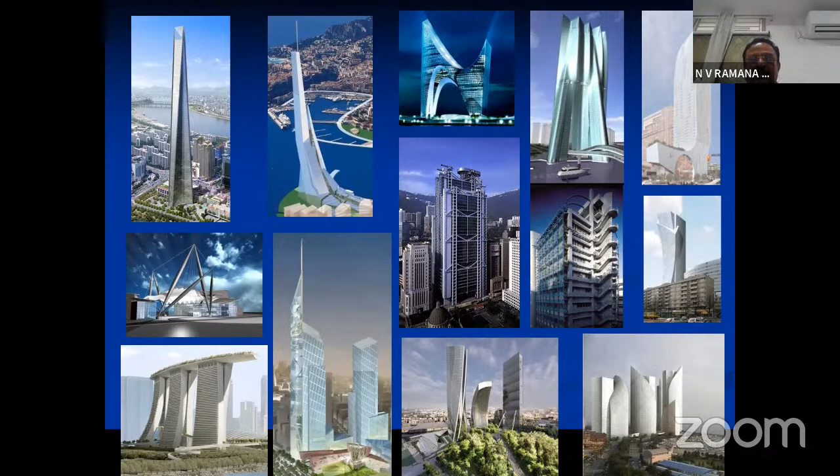So not only there, worldwide, you will find a lot of buildings of different shapes, architecture, engineering. So a lot of reasons are there why they are having so much shape. But all these things are very fascinating for an engineer, and something which we need to really ponder about. And that's what excited me. And then we started working, and then we found many things which are very important as far as high-rise buildings are concerned.

So there is something called the Council on Tall Buildings, CTBUH, which actually designates the tall building based on the height. And you see on the top, the height is calculated from the top of the tower. So sometimes people cheat by actually putting long towers on the top of the building. But that is what it is, and that is the definition that CTBUH has given.

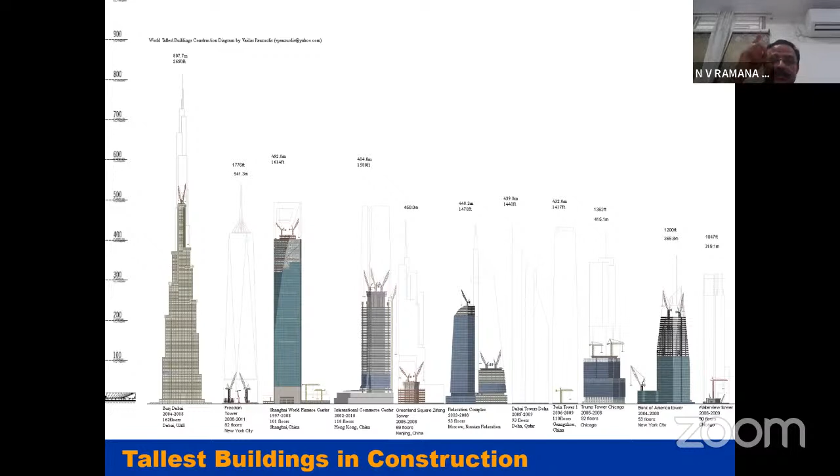And there are several tall buildings, and over a period of time, these tall buildings have evolved. And today, even India is planning to build a lot of tall buildings, not only statues, but buildings also. I will talk mostly about buildings. These are some more buildings over a period of time, a timeline of how they have come. And you see the Burj Dubai is almost 0.8 kilometers high. As a civil engineer, if you imagine what 0.8 kilometers of height is, it is really wonderful. These are the top 10 in 2006, and every year this list is changing.

You can find this in the website of the Council on Tall Buildings and Urban Habitat, which is very, very important. Now, it is not only the design, the construction aspect also is very, very important, because normally, if a two-story building takes, let us say, 6 months, then how much does a 200-story building take? Not just exactly 200 into 6 months. You need to actually adopt different technology, and sometimes instead of going from bottom to top, you may have to come from top to bottom. So there are a lot of technologies involved, and we should be aware.

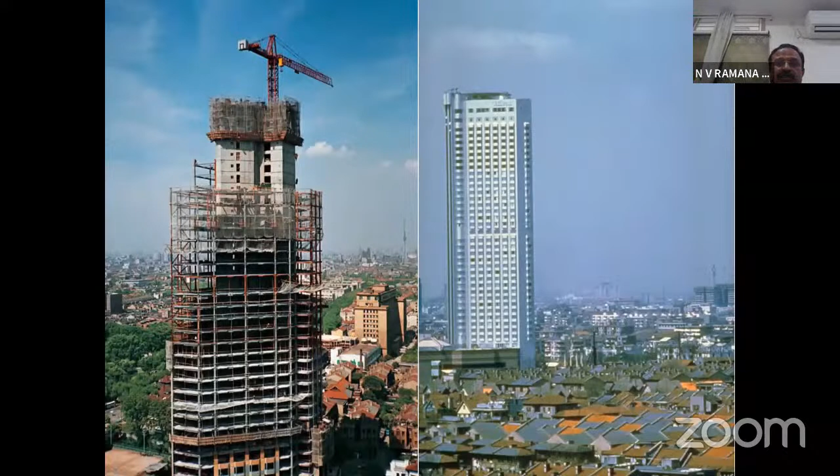And you also need to see what is the surrounding situation, how it is disturbing the architecture, the skyline, other things that are very, very important. In fact, there are some very fascinating buildings across the world, and these are some snapshots to tell you the importance of these buildings. And this is how the Burj Dubai stands in relation to the other buildings in that area. I had the opportunity to visit, and really it was quite encouraging and challenging to see such a marvelous structure being constructed in an area which is nearly on a sea coast.

There are some other interesting buildings. This is Bahrain. The Gulf actually has a lot of such buildings. A lot of money is there, and they can. What is interesting in this building is the architect has actually given a gap between these two. So what the engineer thought is, by connecting these two buildings and putting a turbine to this, you're also generating electricity required for the building.

And that was a wonderful idea. Two things: it is adding stability to the building, and it is also generating electricity, sustainable things. And W.S. Atkins was a consultant, and Dr. Anchuri has really worked very hard on these things.

And when you actually see the cross-section of the building, you can find the Taipei 101 in Taiwan, where I again had the opportunity to visit. The configuration is simply a rectangle with small changes in the edges. Then the Petronas Tower is like a circular thing, and then you've got Jin Mao Tower, which is almost like an octagon. Then you have International Finance Center, which is again different shapes.

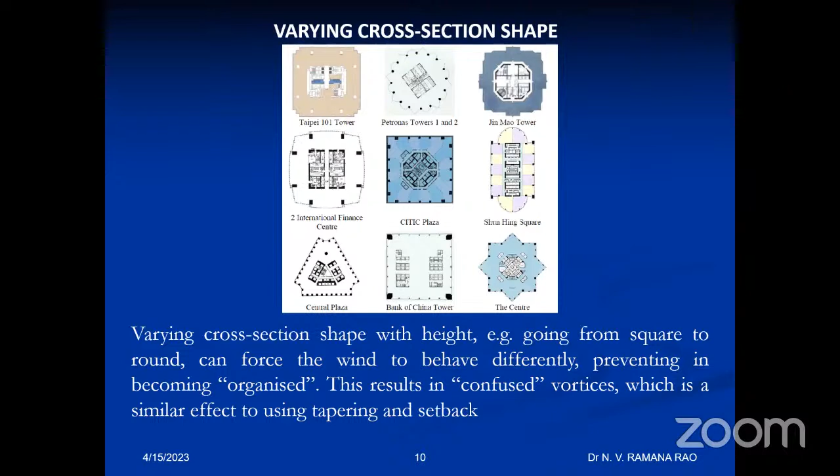Thank you. So from square to round can force the wind to behave differently. So when we think of a tall building, it is not the earthquake that is more important, not the gravity load. The wind load is what becomes critical, especially in coastal areas, where wind is a very important parameter. And most of them are designed in such a way to reduce the wind drag on the surface. This results in confused vortices, which is a similar effect to using tapering, etc.

So you see the edges, especially in these buildings, are made rough and staggered, so that it breaks the wind speed. So a very interesting concept, what we call vortex shedding. This is another building in the UK. It's called the Swiss Reinsurance. The vortex shedding can also be reduced by adding spoilers. On the surface, there are some projections, like steel rods. So this is actually a surface projection.

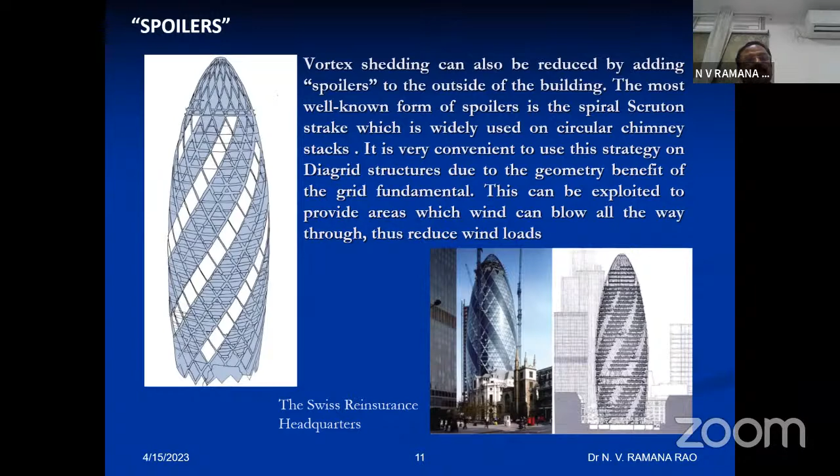You go close to the building, and what these people have done is they have put mirrors in that. It looks very good, actually. The most well-known form is a spiral Scruton strake, which is widely used on circular chimney stacks. It is very convenient to use this strategy on diagrid structures due to the geometry benefit and the grid fundamentals. So this is going to break the speed of the wind and also reduce the wind load on the structure. Then you have other structural forms.

Now we have got buildings which can rotate also, and each floor can rotate independently. So then there is no issue of vastu and other things. A lot of things are actually happening in building technology. And most of these, as I told you, are being copied from nature. So this is the Dubai flower. The structural form has been obtained from that.

This is a Greek firm. Petra architects have designed this blossoming Dubai. It was a proposal for the Zaabeel park, and this is now completed actually. I had the opportunity to see it. The design is in the form of a blossoming flower. So the designer actually got inspiration from nature in developing the form.

Why nature? Nature actually teaches us many things. There are trees which have survived several thousands of years in spite of earthquakes, winds, cyclones and all that. So we need to learn from nature, and there's huge research going on in the building sector, and I think Professor Anjuri is also working on it.

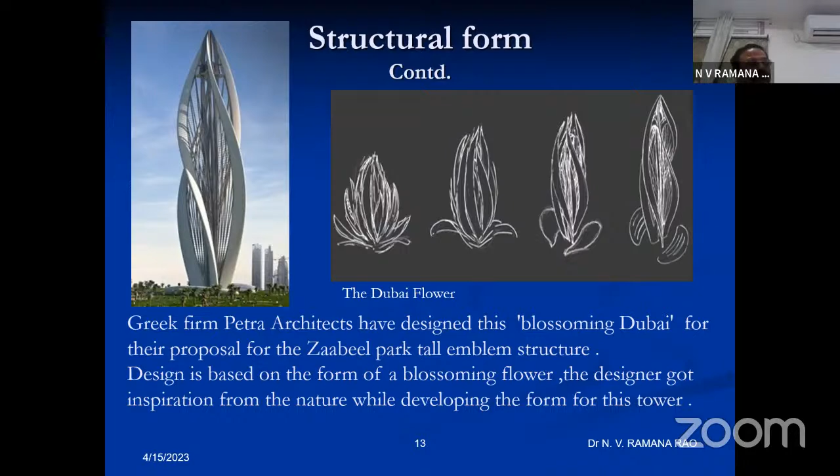Of course, he's a consultant, but he tries and does a lot of experiments. So what we need to do is, we need to carry out stress analysis. Today, we are lucky that we have got sufficient stress analysis tools, finite element tools. We have got software tools which actually try to analyze the lateral deflection, displacements, all the output parameters like bending moment, shear force. You can get to an accuracy of 10%, 1%. So that is the accuracy that you get.

So we can do a lot of saving in the material, and you see how then you decide. In fact, sometimes you evolve the form. That was what our topic was. So we start with some rectangular form, and then slowly we evolve into a shape where the stress leveling is there. What does it mean, stress leveling? That means every part of the building is almost having the same level of stress.

Otherwise, what happens? There is too much wastage of material you are using. Suppose in the lower portion the stress is more, you can use thicker, but in the higher portion stress is less, use lesser material. So that's how the tapering comes up. Of course, functionality will have to be kept. So all these are very, very interesting concepts that actually give a lot of structural insight, and give a spark to structural engineers.

And today I'm happy that in Hyderabad also, we have a lot of engineers who are working in this area. And I understand there is one seminar being organized very soon on high-rise buildings, or it's already over, I don't know. So this is a Dream Tower, again, a Korean architect has done.

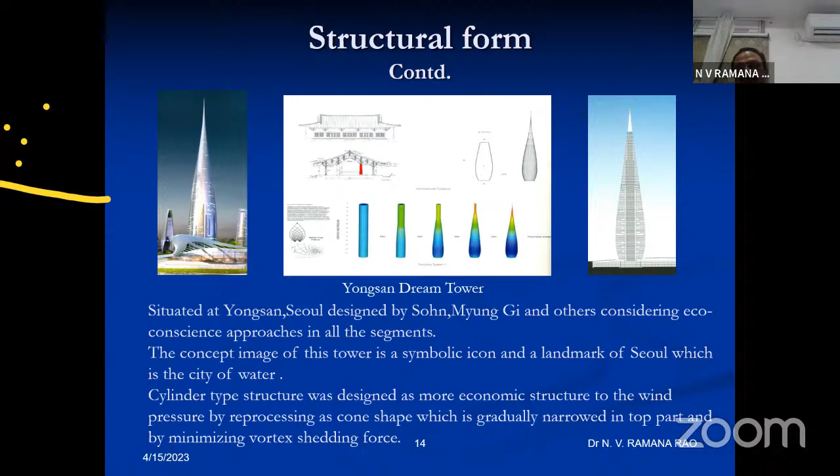Then again, the Dubai Tower I told you about, which is actually 1.2 kilometers high, the main portion is almost 800 meters high, and the tower portion is there. And there are 1,000 shops, 16,000 parking spaces, and so much space is created. And you have some very fascinating buildings in the country.

So wherever there is a shortage of land, wherever there is a shortage of space, engineers are coming out with interesting things. Of course, the basic mechanics remains the same. Like the cantilever has to be supported and all that. There's a balancing and all that. So that doesn't change. But they are playing with it, and very interesting things have happened in the building line.

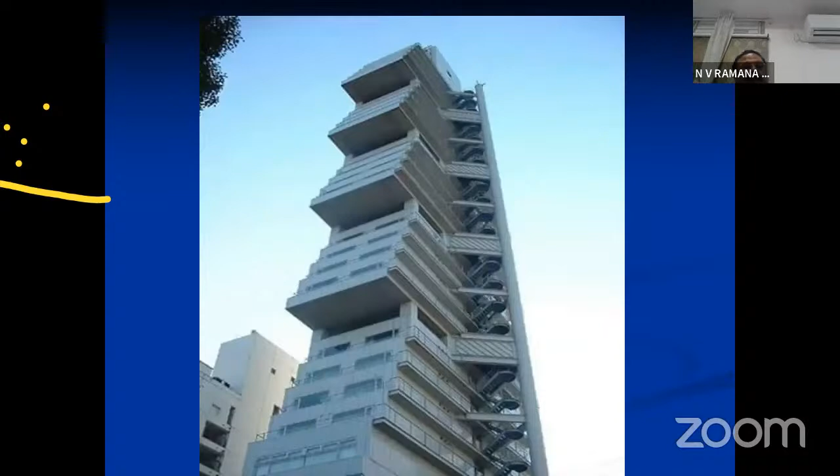So this is another interesting building. I don't know the location, but I think I can find out. And then, when people are fighting for light, space and all that, these are other things that actually come out. Sometimes you need to have refuge floors; when there's a fire accident, people need to come to a common area. So all these things require a lot of planning.

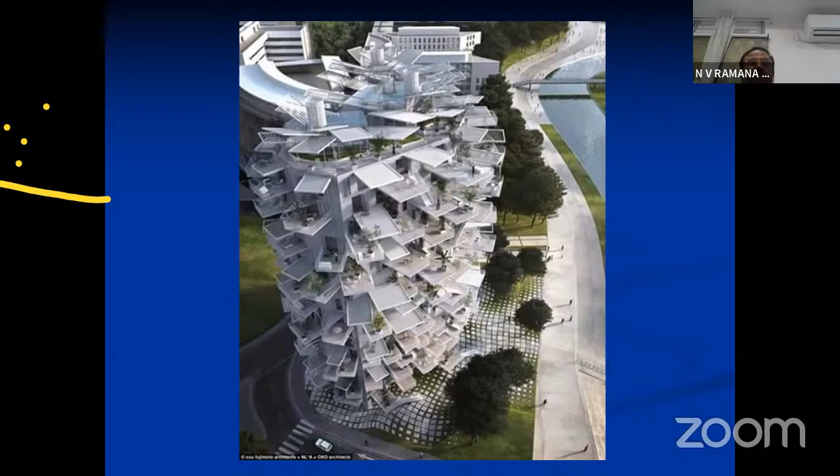And these are all, I just told you, challenges where each one has got a separate balcony. So when the clients come out with requirements, the architects come out with solutions and the engineer has to design it. So these are some of the challenges that people are facing and they are actually solving them. So this is another interesting building where you have lighting. It looks like a wave form, but all this wave is given to reduce the wind load and increase the stiffness, which is very, very interesting.

This is another building, a bank actually, where the top floors are for parking. So the concept is like a simple tree, where you have got a tree trunk and then the branching out. And this is how they have done it. Very interesting concepts.

And this is again one more interesting building. So the artist was inspired by an idol, some movie. So he said, why not design a building like this? And this is on some Italian coast. So when you have the opportunity, please do visit these things because they throw a lot of light.

And I think these are other interesting buildings, where people are actually playing with the architecture, and these are not animated, they're all real buildings, okay? And very interesting concepts come out.

Mostly these are our very rich owners; casinos and all these things will be there, shopping malls will be there. So here the client is able to afford a lot of money, and today we have technology, we have software, we can predict the behavior of these structures under wind load, earthquake load, so combination of loads. And very interesting results are coming out.

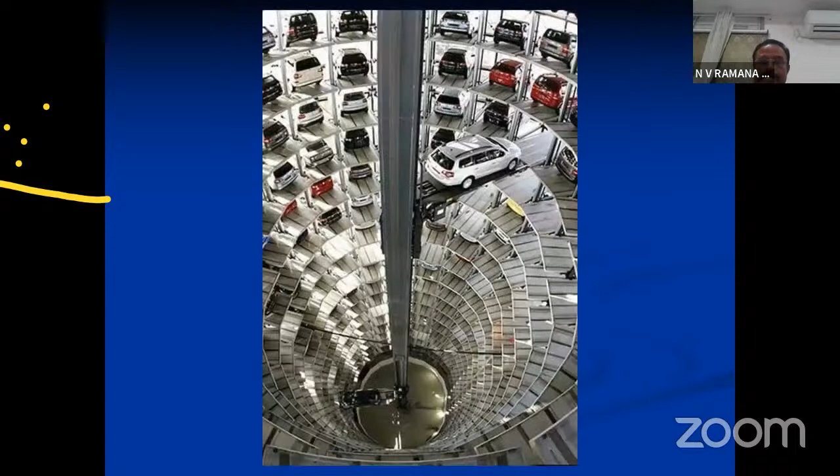In fact, this is another building there. The twisting is coming to increase the stiffness, and this is how it looks like. And then this is another tower in Malaysia. Actually, you can see this. This is Lisbon, sorry, in Portugal, and this actually is again a casino. And this is for multiple parking. When you go to such a complex, you need to have these sort of arrangements.

Then these are multiple buildings. So you see the interesting concept is a bundle actually. It's like a bundle; like in childhood we used to study that a single stick will break, but a bundle of sticks cannot break. So they are the bundling concepts. I'll also tell you the structural concepts behind it, because these are issues. These are some interesting things that have come out.

And some people are actually having a top with the top itself a city-like thing, a swimming pool, parks and all this. These are all now happening, especially in Dubai, Malaysia, and you can see hotels, the Skyway. So basically what is happening is, I can build anything, but the cost is a consideration, the time is a consideration. Today we've got 3D printing, the shape is no more a consideration.

So today, structural optimization plays a very key role, enabling us to create buildings with unique shapes and aesthetic values. Doing more with less is the need of the time. That means you have to do more with less amount of materials, less amount of money, and less amount of time. These are the challenges. So structures by their own nature are sustainable. So good structural engineering emphasizes achieving great efficiency and minimization of the material.

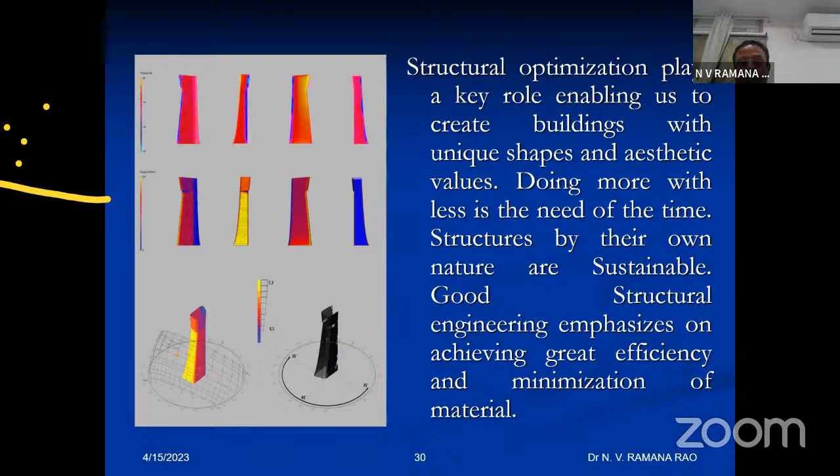In fact, I told you that nature is teaching many of us, and so I call this a nature-inspired building, or getting from nature, because we all love nature, and you all as engineers think about nature more than ourselves. So the skyscraper in Taipei, in fact, was inspired by the bamboo plant, where you have stiffeners in the middle. Very interesting concept.

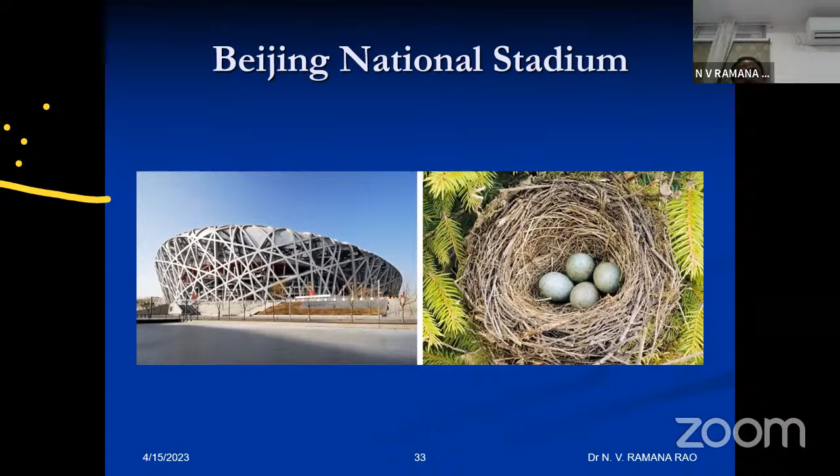Similarly, the Beijing National Stadium, also called the bird's nest, was inspired by the bird's nest. Again, this is a very stable arrangement. Of course, it's not regular. It's an irregular arrangement like tying down, but it's very stiff. And this stadium is an interesting concept. When I visited China, I had the opportunity to visit it in Beijing. You should really see these structures. They are very inspiring, and the engineers and architects get inspiration from nature.

And this is the Lotus Temple in New Delhi. I'm just quoting internationally, but we also have wonderful architecture and buildings. So this is inspired from the lotus. Okay, this is how it looks like.

Then we have the Center for Disease Control in Taiwan. In fact, I had stayed in Taiwan for almost 2-3 weeks as a part of a delegation from NIT Warangal and the Association of Indian Universities. There, these structures are very interesting, and this is like a research laboratory; they want to inspire the mind. They want to think of out-of-the-box solutions.

Again, let me tell you, even in India we can do it, but here the time and cost is very important. The time is important. If somebody is given freedom, that there's no limit on the cost, no limit on the time, no limit on the space, then we can also come out with it. So this particular design was inspired by the shell, the sea shell.

And the Palm Island, of course, is from Dubai, very common, and most of you are aware of it. Then the skyscraper in London, which I showed you, the surfaces with all those things came from this particular plant. I don't know what they call it in English. Then the Olympic Pavilion in Barcelona is a model of the fish.

Similarly, we also have the Chicago Spire. Again, it has been inspired by the shell near the sea. So they go there and they come out with it. This is a small scale; why not mimic it at large scale? And please note that they are very much structurally efficient.

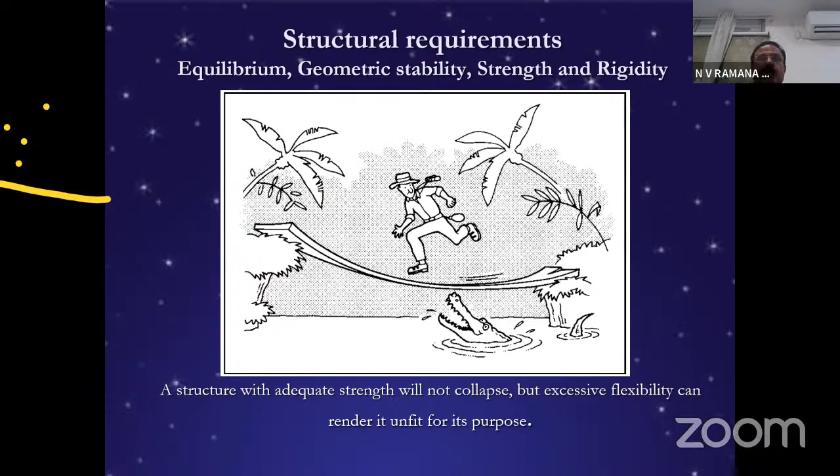So this is just a cartoon sort of thing. Don't take it as real, but I'm just trying to illustrate the idea that stability, strength, and rigidity all are important when you actually design. So let us see now what are the materials that are actually used, and how these materials really help us. So we have masonry, timber, steel, and concrete. These are the major materials.

Now, of course, fiberglass is coming. Glass also is being used as structures. And then we've got other types of materials that are coming, but they're expensive. So I'll talk only about masonry, timber, steel, and concrete structures. So the shapes which are adopted for the structural elements are affected to a large extent by the nature of the materials from which they are made.

In fact, please understand that the relationship between structural form and structural efficiency is very, very important. Form has an important role to play. In fact, my whole PhD was on form optimization, shape optimization, what we call it. So for example, you take a plain paper and put something on it, it just collapses. Same paper, if you fold it and then you release it, it becomes stiff, and you put something, you can hold it.

So that is the idea, and a lot of research has gone on, especially in Germany and Japan, where they have a paper, they load it, and then they reverse the paper as a structure. So that way, they can come out with different shapes. So there is the effect of form on internal force type, and the concept of improved shapes in cross section and longitudinal profile. So all these things are very, very important.

So we should understand the main objective of structural design, however, is the achievement of an appropriate level of efficiency rather than the maximum possible level of efficiency. So this is again very, very important.

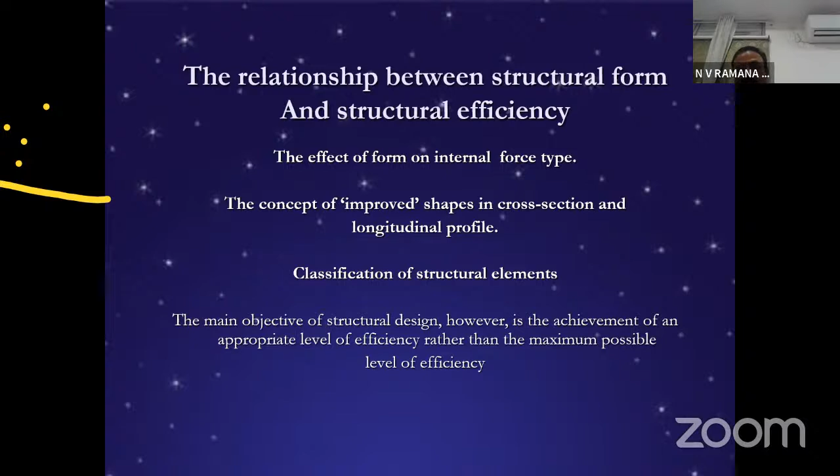Now I'll just show you an example of how in one of the buildings they designed to reduce the wind. So this was the original thing. You see, the corner is very stiff. I don't know. Yeah, okay. You just see the corner is like this. So the engineer came up with an idea. Why not make the corner like this? But this has no structural purpose. Of course, only an extension of that.

So by doing this, there was a 20% reduction in the wind load, and because of that, there was an 8% reduction in the steel, which came to almost 6,000 tons of steel. So we need to think of ideas when large-scale usage is there, how to optimize it, how to reduce the consumption of steel. And that is where engineering ingenuity and all these come into the picture.

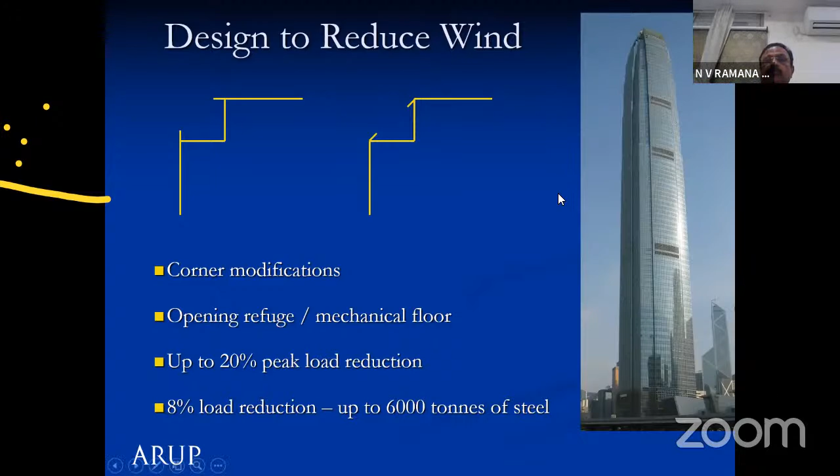Again, very interesting. I'm just giving some ideas of how we do it. And then, very interesting, they have some openings in the middle. So these openings actually are to reduce the wind load, because you allow the wind to pass. So basically now, because it's all wind load, the issue that governs is deflection control.

Okay, the strength we are achieving anyway, but deflections: people who are sitting on the top floor should not feel swinging, and they should not feel uncomfortable or uneasy or nauseated. So the codes of practice have put some limits on deflection, but different codes in different countries have actually come out with different deflection limits.

For example, there are some codes in the US where you've got H/500, whereas in Dubai you have H/400. On super tall towers, you've got H/300 because you cannot control the deflection. So why deflection control?

Because there will be shear moments, if there are openings, and then there will be closing of stack joints, and the internal partitions break. So that's why deflection is very important. So what we need to do is reduce the deflection - that's another challenge, another issue.

Arup, the UK-based engineering firm, came out with dampers. You see in the bottom portion there is a damper, and this is like a spring. Whenever there is a movement, it actually dampens, and this provides about 10% damping with very high reliability, which is very useful to reduce the forces in the structure.

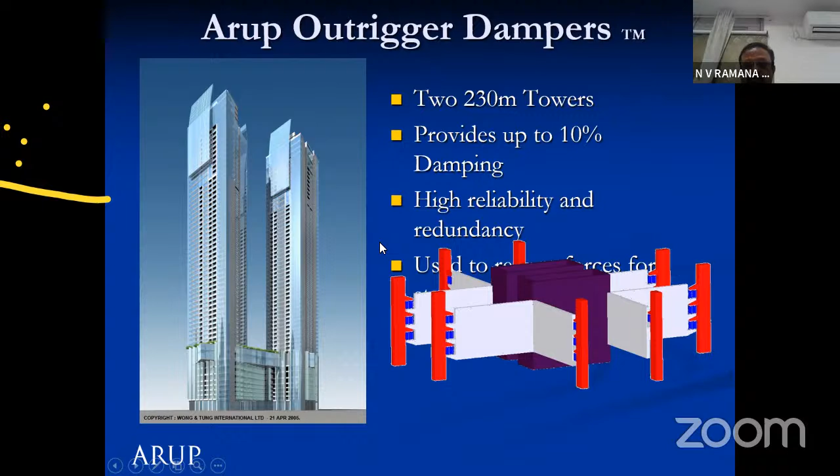There are also some other shapes which are very fascinating for all of us to see. Let us see some more structural forms. Complex geometry is there in tall buildings, and please note, these geometries are now easily generated through CAD and easily created through 3D printing. Today we have the technology, the software, we have everything - virtually limitless 3D generative vocabulary with today's software.

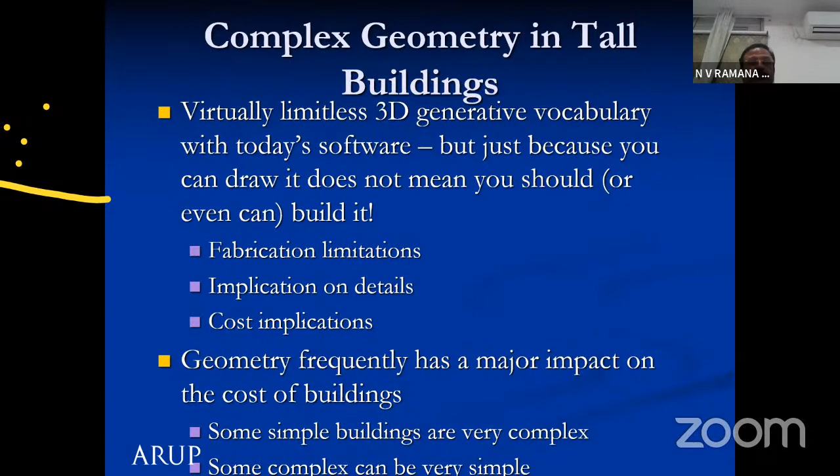But just because you can draw it does not mean you should also build it. There are issues like fabrication limitations that we need to consider, issues of implication on details, and issues of cost implications that we should be responsible for as engineers. Of course, geometry frequently has a major impact on the cost of buildings.

This is again an interesting building - why was this building bent like this? If you see the cross section, this consists of frames and then steel tubes all around. This is an Italian building, designed by Arup. What they did is provide bracings like this. Even the Statue of Liberty, if you see, is all steel tubes, and even our Statue of Unity has an internal concrete frame. So very interesting structural concepts, especially when things are going tall.

You should visit and try to think - it's very interesting. The bracing allows for transfer of load between columns and provides lateral stability. Similarly, the columns are on a radial grid to follow the surface, and you have the center of mass and center of stiffness close to each other, so the torsional twisting moments because of earthquakes are not there. So this is what is really driving the structural concepts.

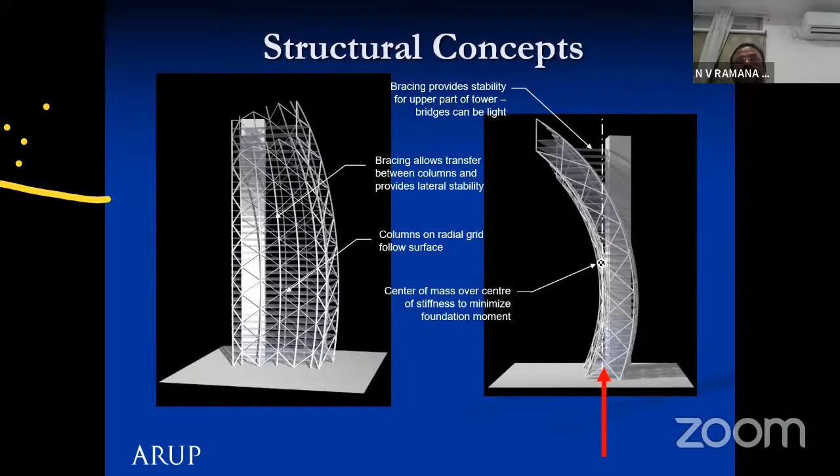Then we have, as I told you, this residential project in the Middle East, and you see the surfaces all have a sort of stiffness. What they do is vibration analysis, modal analysis, to see how they twist in different modes, and this is what it shows. Then you come out with the best shape possible - this is the plan of that variation. Based on that, you can arrive at the location of stiffness and other things for deflection control. So a lot of analysis goes into this, a lot of issues and concerns are there.

It's not just that people are building - you design, I build. No. You have to see the structural safety, the structural stability, everything. So that is what is driving it.

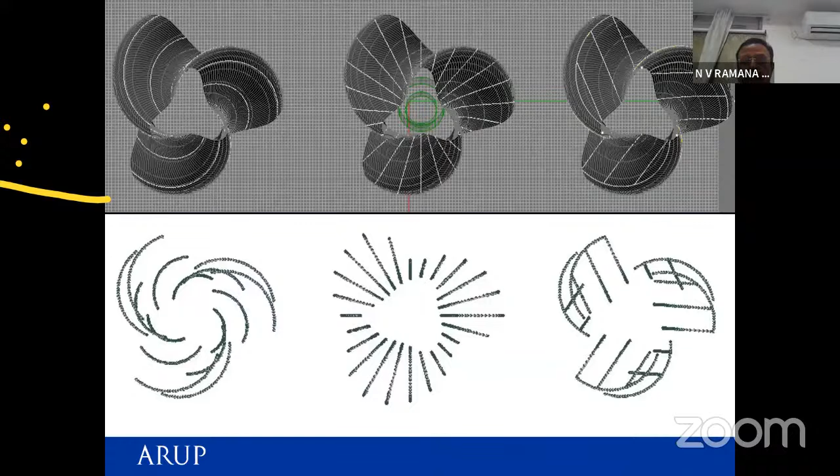Then we have this another interesting building, which looks like this. It's an L shape in the middle, and then things.

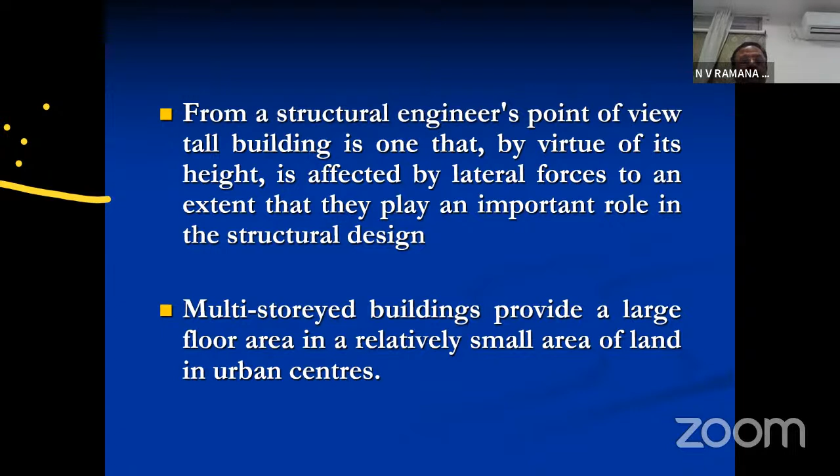From a structural engineer's point of view, a tall building is one that, by virtue of its height, is affected by lateral forces to an extent that they can play an important role in the structural design. Of course, multi-story design provides a large floor area. Why are we building this way? Because they provide a large floor area in a relatively small area of land, so everybody goes for it. You can't stop it, but now we need to make sure it is designed properly.

So I told you about the Council of Tall Buildings. In fact, I held one national conference at Hyderabad on tall buildings design - that's how my interest generated. Even though it was a national conference, we had about 25 international participants, including someone from the Council of Tall Buildings, and they gave us a lot of ideas. There was a code being written at that time, and a lot of things from the national conference, which I held as convener, were incorporated into that code. So I feel really proud about it - this was all when I was at JNTU.

So what the Council of Tall Buildings says is it defines a tall building as a building whose height creates different conditions in design and construction.

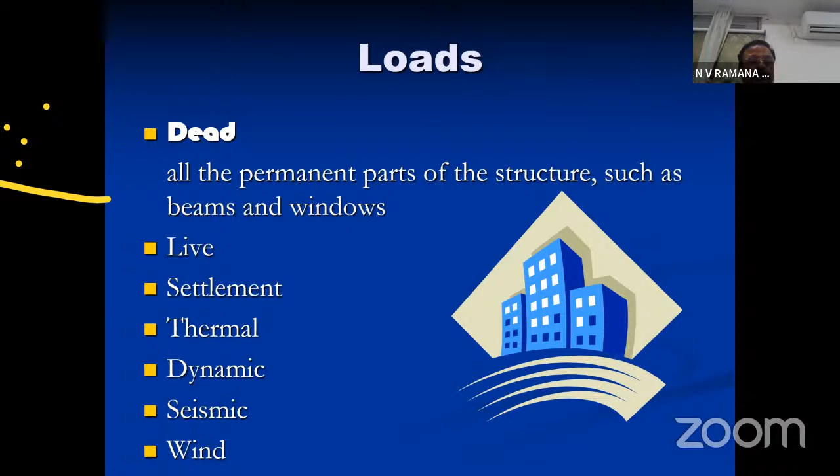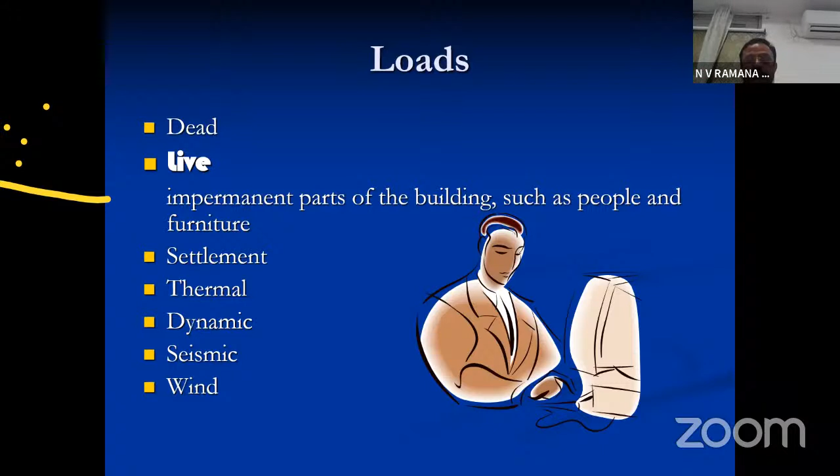Live load is an impermanent part of the building, such as people and furniture. Settlement relates to the soil - you have towers like the Leaning Tower of Pisa. So we need to consider how much weight is falling on the structure, whether it will trigger any issues, whether it's settlement - all these things.

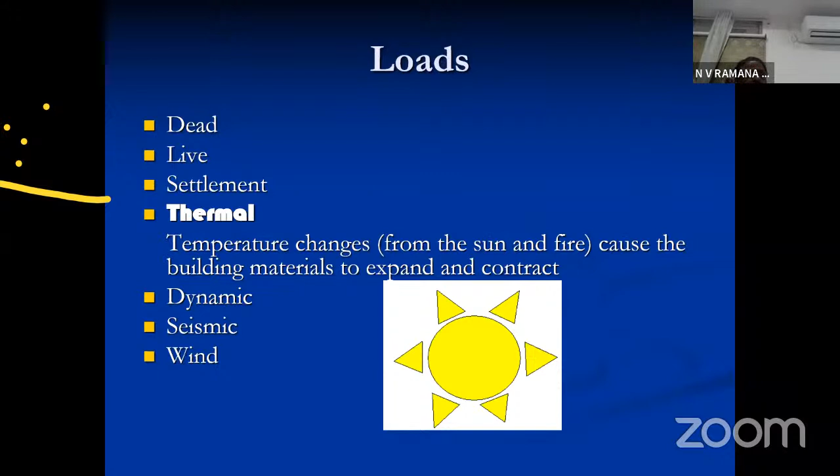Then we have thermal loads because of sun and temperature changes, especially in countries where the day-to-evening temperature variation is very high. Then dynamic loads, like movement, and then seismic loads - earthquakes - and wind load. So these are the loads we definitely have to consider while designing a structure.

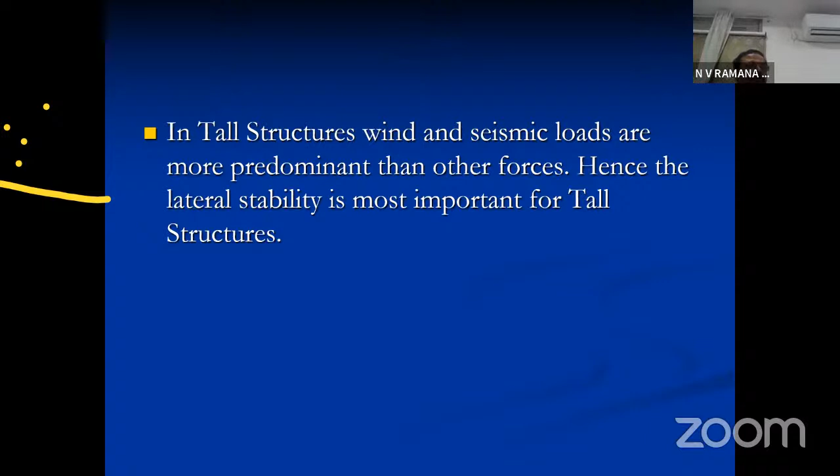In tall structures, luckily wind and seismic loads are more predominant than other forces. So we do load combinations and take the worst combination. Hence lateral stability is more important - we are more concerned about lateral stability than vertical stability, and that is what drives the design.

So these lateral forces come because of wind pressures on the sides of tall buildings, producing base shear.

Brahmareddy garu, how much time do I have actually? Is anybody there at the other end? Sir, you can continue, it is very interesting. Okay, please - because I have to maintain time also as a teacher.

So these forces cause horizontal deflection, and the top of buildings will drift.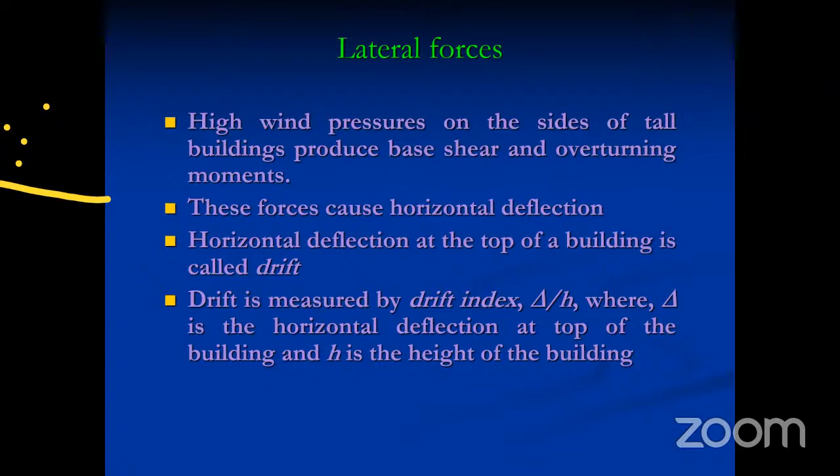Yes? Sir, you can proceed. No problem, sir. Okay, thank you.

I'll take another half an hour and close it because I know people are online and they might have other issues. So horizontal deflection at the top of a building is called drift.

I'm telling you this in very simple language. When you go into the formal course, they use very complex language, but I try to simplify because these are called popular lectures - even if you're not an engineer, you'll appreciate them. That's how the lectures are designed. The idea is people should be sensitized to the importance. You just cannot do things the way you want - especially politicians come out with ideas for higher structures, but we need to take into account all the things.

So drift is very important. Drift is measured by the drift index, called delta by H, where delta is the horizontal deflection at the top of the building and H is the height of the building. This is how we define drift - suppose H is the height, and delta is the lateral shift because of wind load. So drift index is delta by H.

The IS code says - and we cannot ignore IS codes - the drift index should not be more than 0.002 of the total height. But if you follow this for high-rise buildings, you can never design a high-rise building in India. So that's why we go to international codes and try to get around many of these constraints.

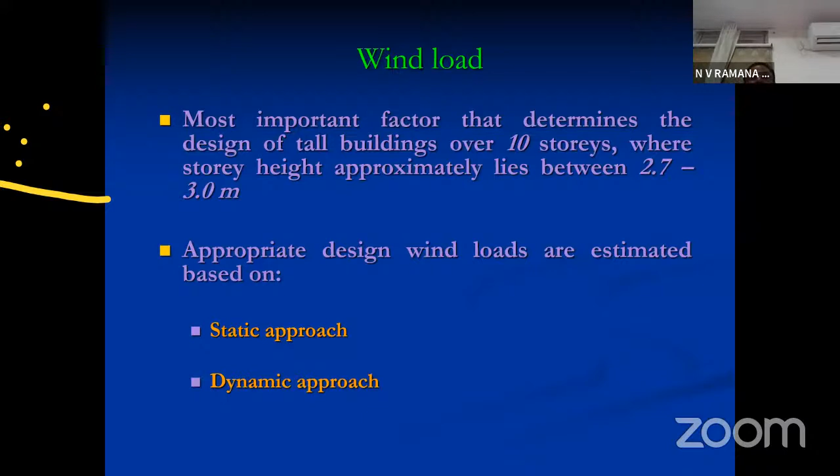So the lateral forces I mentioned, and wind load - you have different approaches for solving this. Normally the story heights are of the order of 2.7 to 3 meters. So you have static approaches and dynamic approaches that are actually applied for analysis. I've not put any equations in my presentation, so please don't get scared.

Now, what is the effect? Just imagine the effect of wind load is to cause vibration and swing in the building, like an earthquake. The building itself is strong enough to withstand normal wind loads by swaying. The tallest buildings sometimes sway several feet, but the sway is important because it should not be enough to make people seasick and cause objects in the buildings to fall over. So we have to control the drift, and that is what is done.

So what people do is, these studies are done in different laboratories. In fact, we have done it at NIT Warangal, IITs, and also in the UK when I was doing my PhD with these studies.

You see the wind flow is there in different shapes, and you can study how much intensity is there of the wind, what is the velocity, and you take different shapes and then study the behavior of different shapes with respect to vortex shedding. So this gives us an idea.

You're not just doing it arbitrarily. You are thinking what is the shape that actually reduces the wind minimum. You allow some gaps so that wind passes through, there's some crossing, all these things. So you have a lot of opportunity to experiment and do this. It's called vortex shedding because of crosswind.

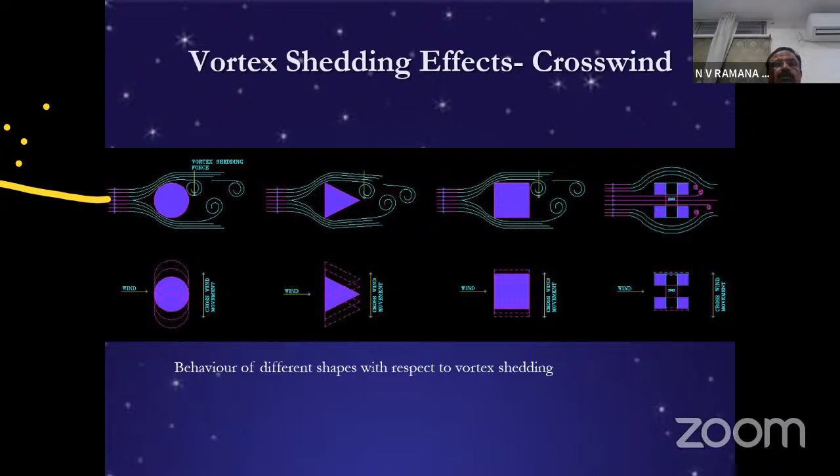And you see again Taipei 101 in Taiwan. I was wondering why they put the surface like this, but this surface is to reduce the rough corners. If you have this, it can reduce vortex shedding effects. It's called Taipei 101 because there are 101 floors. On the top floor, you can see the whole of Taiwan. Very wonderful.

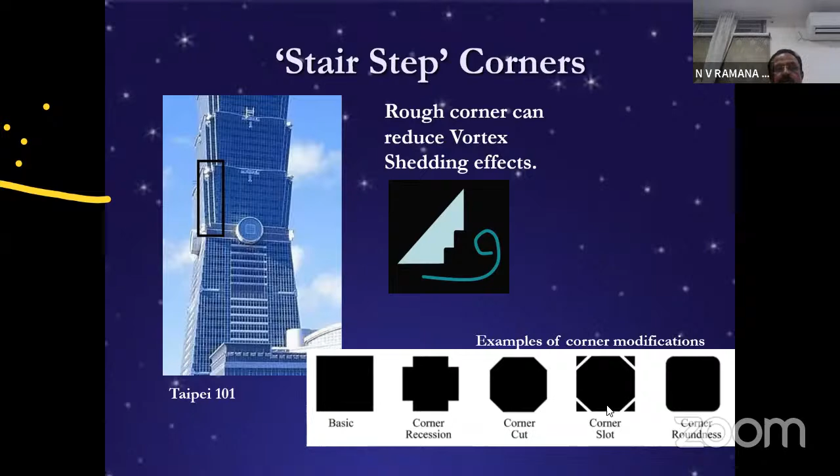So the corner modification - by just taking a rectangular shape, you are not doing much. But by slightly doing the corner modification, like smoothing and other combinations like roundness, you can really reduce the wind loads in it.

In fact, some buildings have openings. Why do they have openings? Because the slots reduce the wind forces and sway from vortex shedding. So these openings really help to reduce the wind load, and very interesting things come out of it.

And sometimes you rotate the building and twist it, because this rotation will minimize the load from one direction, and also twist to avoid simultaneous vortex shedding along the height. So that is the advantage - when you change the shape as it goes high, the vortex shedding gets reduced.

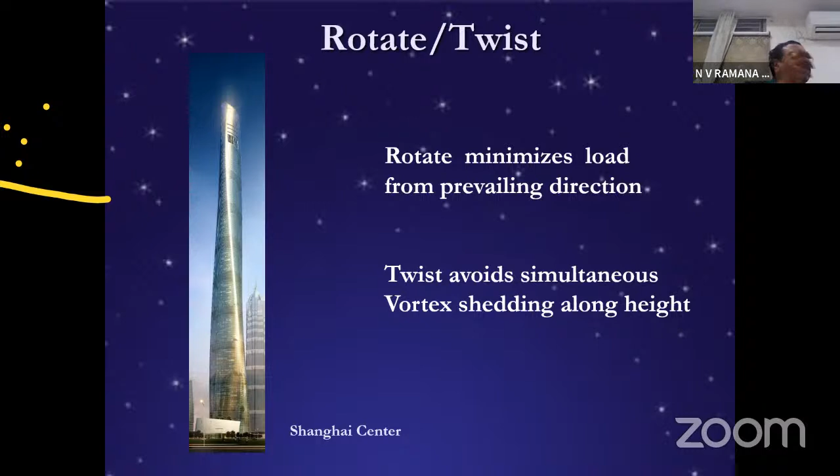So again, all these shapes are not just done out of curiosity. There's a lot of engineering in it, a lot of technology in it, a lot of science behind it. And that is what is curiosity.

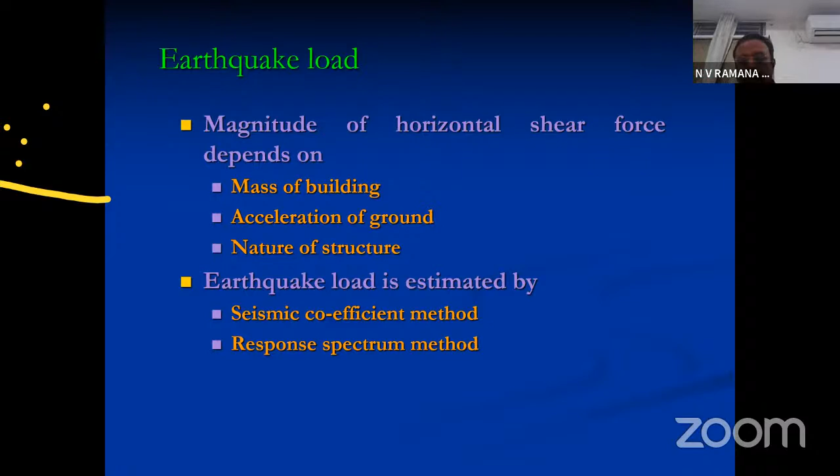Coming to earthquake load, of course it's important. The magnitude of earthquake load depends on the mass of the building, acceleration of ground, nature of structure, seismic coefficient methods, and we have response spectrum method and all these things. These are technologies that we have to learn and use. But now softwares are there which can do many of these things, so you don't have to do them manually.

Seismic motion, as we are aware, will cause horizontal and vertical ground motions. The vertical motion is much smaller in magnitude, and the factor of safety provided against gravity loads will accommodate additional forces due to this motion. The horizontal motion of the ground causes the most significant effect on the structure by shaking the foundation back and forth. You can imagine what happens in an earthquake, okay? We're all engineers, we know what it is.

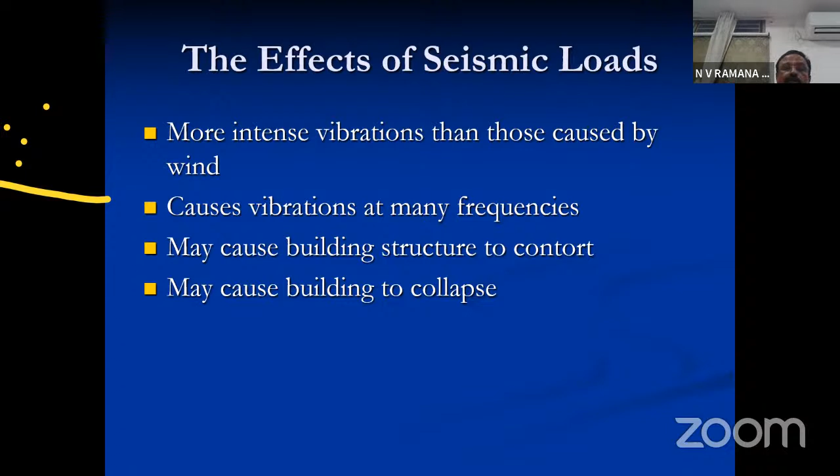And the mass of the building resists this motion by setting up inertia forces throughout the structure. In fact, the effect of seismic load causes more intense vibration than those caused by wind, at many frequencies. This is very interesting - if the natural frequency of the building matches the frequency of the earthquake, then resonance occurs and collapse occurs. This may cause the building to contort, and may also cause the building to collapse.

So let us now see different mechanisms for how you actually reduce these forces because of earthquake and wind. These are what we call lateral load resisting frame systems. We have 4 types: moment resisting frames, braced frames, shear walls, and we have several combinations. We are doing a lot of work on it, but I don't want to discuss that - simple things I'll tell you.

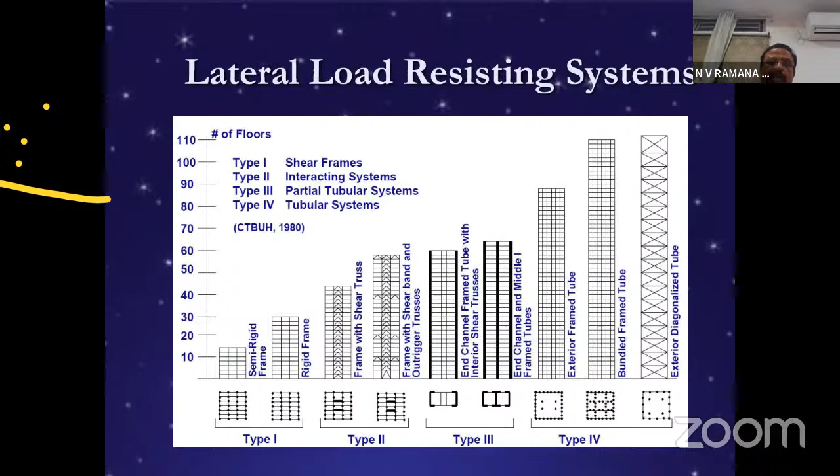So this concept system - you've got shear frames. What I show you is a framing system, it looks like this. You've got an interacting system. I'll also show you real structures and how they are mapping onto this. Interestingly, these are the configurations, given by the Council on Tall Buildings. It's a wonderful organization, does a lot of research and encourages a lot of innovation. Every year they constitute Innovation Awards, and a lot of new things are coming up.

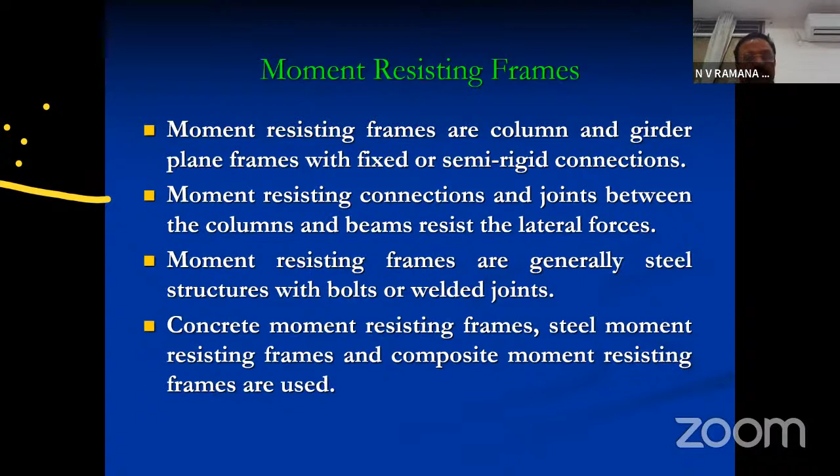So the moment resisting frames are columns and girders in plane frames, which you will find have fixed or semi-rigid connections. Moment resisting connections and joints between the columns and beams resist the lateral forces. The moment resisting frames are generally steel structures with bolted or welded joints. Then we have concrete moment resisting frames, steel moment resisting frames, and composite moment resisting frames, which are used actually.

So these brace frames are like X braces and K braces. I'll show you some examples now. So they act the same as shear walls, so you might have wondered why they're putting X and K and all this. These are very important because the vibrations may cause the bracings to elongate or compress, in which case it loses effectiveness. So therefore, we generally don't use concrete brace frames. You have only steel. So I'll show you.

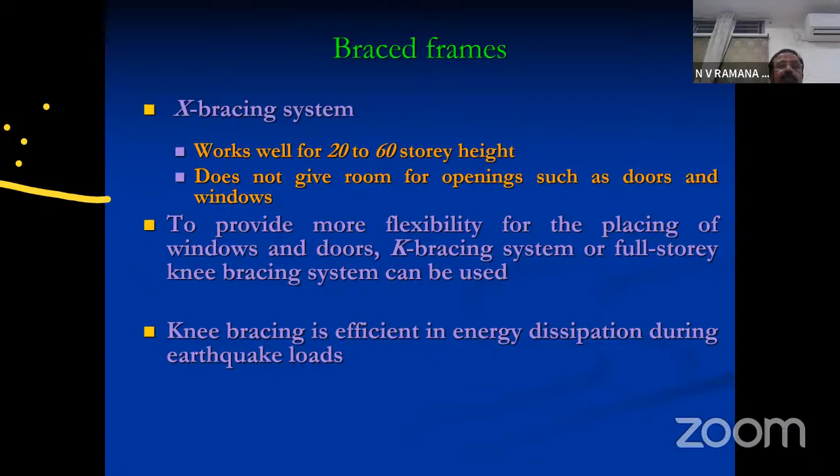Then you've got the X bracing system. This works well for about 20 to 60 story height, but when you have X, you cannot allow the vehicles to pass below it. So this is not used for openings such as doors and windows. So to provide more flexibility for the placing of windows and doors, K bracing systems or full story knee bracing systems can be used. In fact, knee bracing is efficient in energy dissipation during earthquake loads.

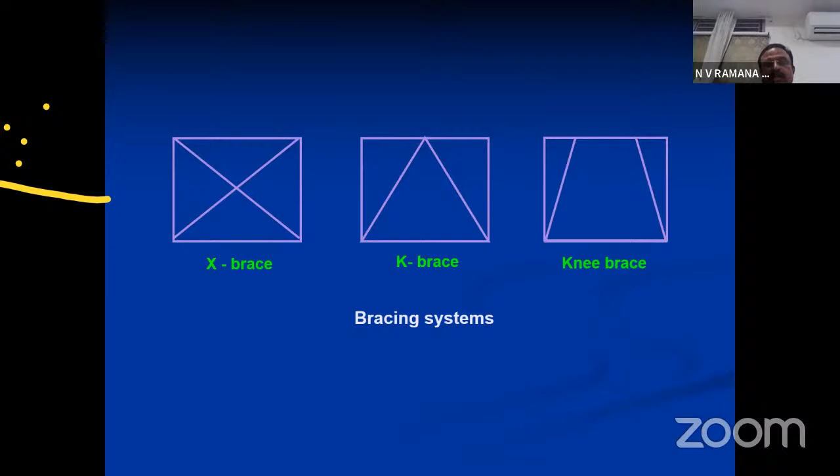Now, this is how X brace looks in a building. So imagine in a ground story, where the car will enter, they cannot enter. So K is a good idea, or sometimes knee brace is a good idea. So all this is coming out of intuition, issues, concerns, and then you solve it out.

Then you got the shear walls, which is the latest technique. The shear walls are plane elements of reinforced concrete thin walls, having length and thickness, providing lateral stiffness. They resist lateral loads. They are very rigid. They receive lateral force from diaphragms, and they have lesser ductility and may not meet the energy required. So what happens? Let us see.

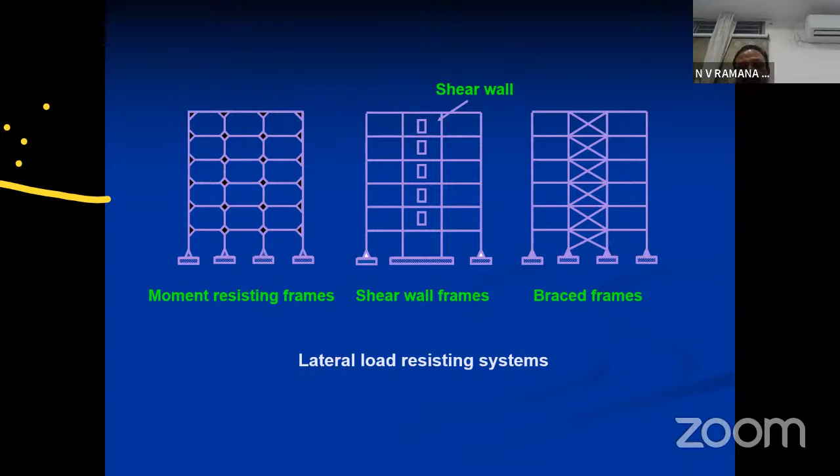So again, this is an example of shear walls. This is a normal frame in a building. Up to a certain height, you can do it. And these are shear walls. And there's a wall actually, with some openings. And sometimes, these walls are also braced inside. So these are all lateral load resisting systems to reduce the wind load, earthquake load, and improve the stiffness. So let us now see the examples.

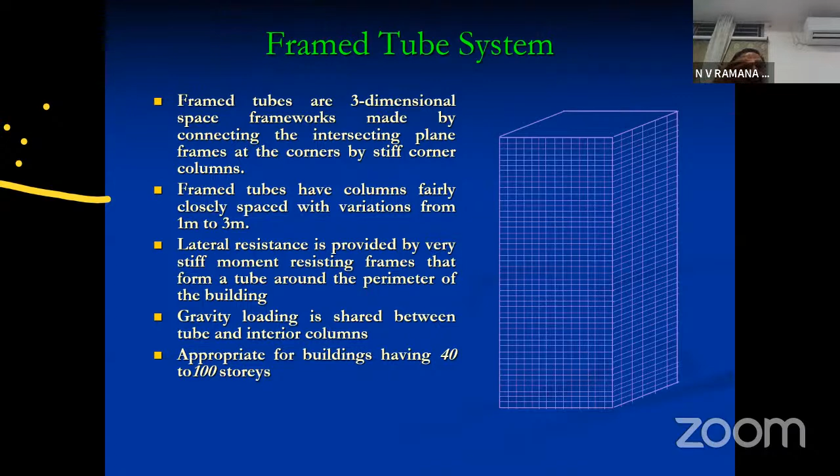Then you have the framed tube system, the 3D, where you have got frames all around the building and tubes. And these are lateral systems, which are very good, and they provide very stiff moment. Then we have gravity loading, and appropriately this type of arrangement can be used from 40 to 100 stories. Now, we started from 10 to 12 stories to 20 stories. Now 40 to 100 stories, not more than that, with this sort of arrangement. So this is again a building like this. The World Trade Tower used this type of framing system.

Then the braced tube structures. In addition to the vertical frames, they also have tubes with X bracing all over. So the structure behaves under lateral loads more like a braced frame, reducing bending in the members of the frame. The spacing of the columns can be increased and the depth of the girders will be less, thereby allowing larger windows than in conventional frames.

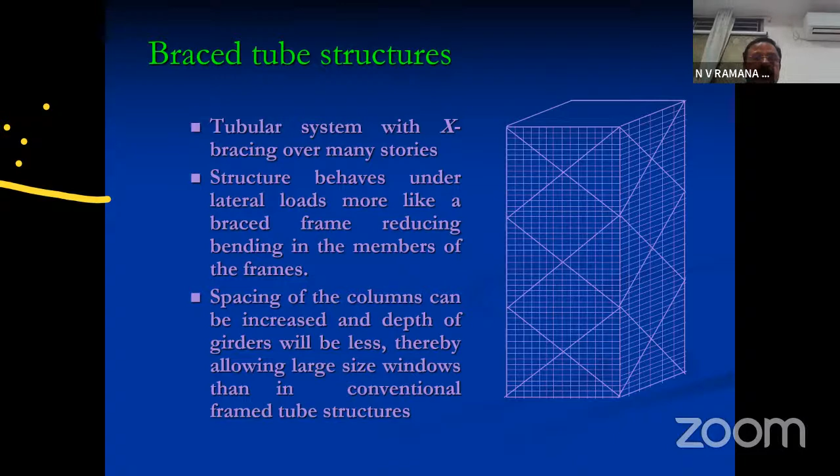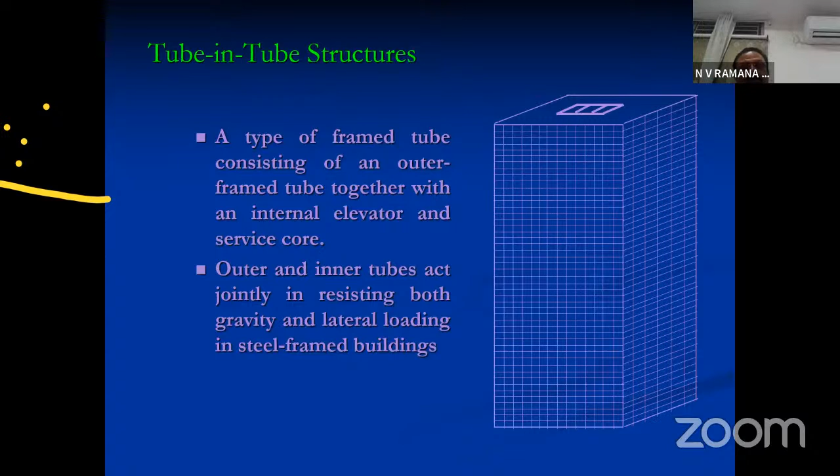Then you have a tube in tube. So you have external tubes. This type of framed tube consists of an outer framed tube together with an internal elevator and service core. So the internal tube is there, or the elevator is there, and a service core. The outer and inner tubes act jointly in resisting both the gravity and lateral loading in a steel frame. So how does it look?

Then you have got the bundled tube, tube with belt truss, and tapered. So let us see some examples of these. This is a bundle, the Sears Tower in Chicago, which Fazlur Rahman Khan designed. It's a bundled type. Bundling is more stable. So imagine, these were built in 1974.

Today we are in 2023, and so much change in technology has come, but still, with some of the concepts, civil engineers are going bigger and bigger, and electronics are going smaller and smaller. So somewhere, there's a challenge for all of us.

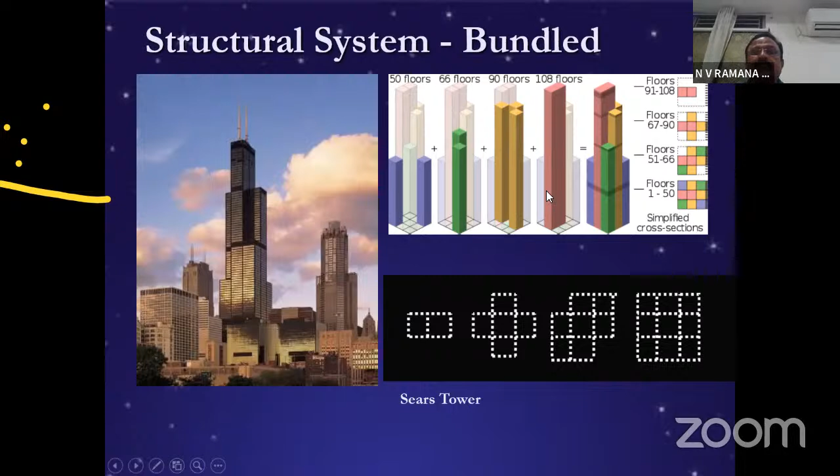So with these bundled structural systems, you have different combinations coming out. You can bundle either 2-way or 4-way or all the things; like you have the magic box, you can do it and test it. And these simple experiments can be done in the labs of colleges and universities, and you can correct. So if you just do this, you have 50 floors. If you can do like this, about 66 floors, then 90 floors, then 108 floors, you can go on, till the sky's the limit.

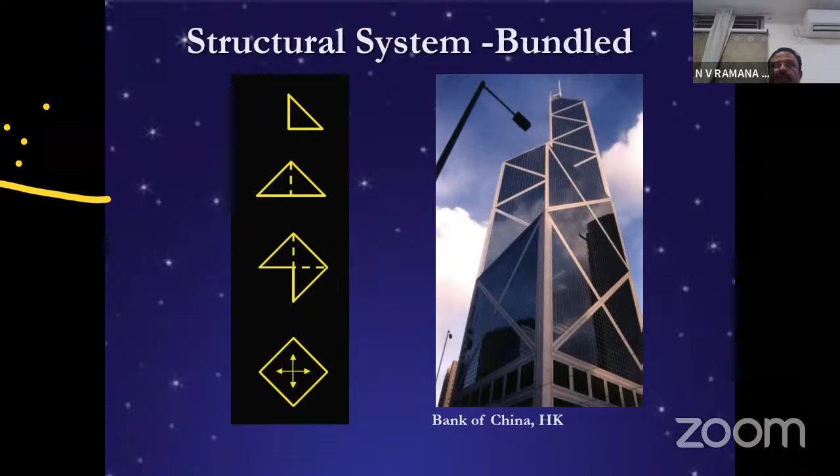Then you have got the bundled system, a system like this. You see how the configuration is changing. Till a certain level, you have a rectangle, then this, and finally, on the top, it looks like the Bank of China, Hong Kong. In Hong Kong, this building is there. Please do visit when you have the opportunity. And these concepts are really very efficient, very interesting, and they'll ignite your mind: why is this like that? If you can really enjoy it, you can do it, of course.

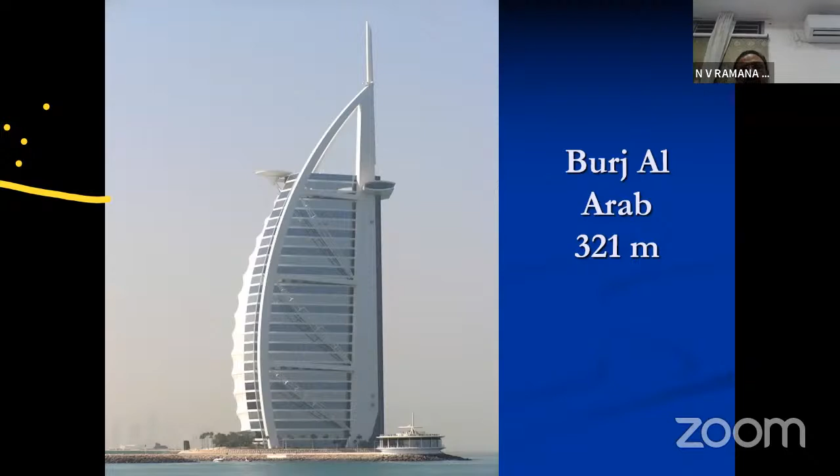So these concepts, what we learn in the labs, are all simple mechanics, okay? What we learn is how the force transmission is there. So the idea is to see that the force transfers efficiently, the material is used efficiently, the look is very good, and all these concepts you need to do.

So the design criteria, I told you, is what is important. Strength is very important. Stresses should be within the permissible limits; for example, the steel strength and the concrete strength should be within the permissible limits. You should have a good factor of safety. And the serviceability requirements, like deflections and displacements, should be within the specified limits. Then, for whoever is staying in it, there should be human comfort, like accelerations within specified limits.

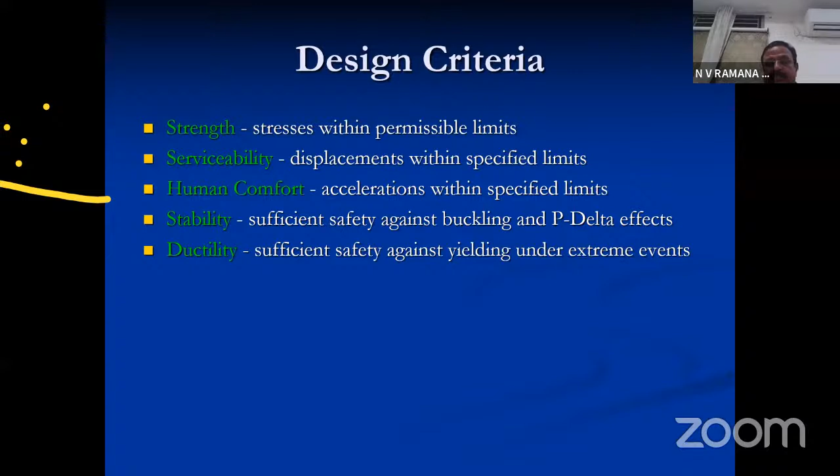Then stability, of course, is very important: sufficient safety against buckling and P-delta effects. And then ductility: sufficient safety against yielding under extreme events. So, whatever we do, the objective is that it should satisfy the serviceability requirements, the strength requirements, the long-term durability requirements, and also the overall life cycle cost. So any structure that we do, a lot of engineering goes into it.

We have to first input the loads correctly, the load combinations, then you have to analyze. Today, we are lucky that there is a lot of software available which can accurately predict the displacements and outcomes to an accuracy of less than 1% error. Then we have to see the responses like bending moment, shear force, and deflection. And based on that, you can change the shape. You can do it several times because now a computer is doing it. And you can do mathematical modeling and arrive at the most optimum design. So optimization is very, very important in these things.

And that is where my student, Sri Anchuri, has worked a lot. Of course, I stopped at it, but he's still doing a lot of things, and he himself is now an authority in this area. So design issues are very important. An ideal structural system should be one in which the steel required to carry the gravity load should also carry the wind load.

So you don't have to put extra steel. Whatever is sufficient for gravity. So that's where the optimization comes in. So optimization could be such that the wind could be carried out while keeping stresses within the difference between allowable stress for gravity plus the additional stress. Normally we increase the stress by 1/3 when wind load is there. So this 1/3 increase allowed in the allowable stress may be just sufficient to carry the wind. So the premium for wind is often minimized by an optimum design of beams, columns and floor systems to match the given stress limits and drifts.

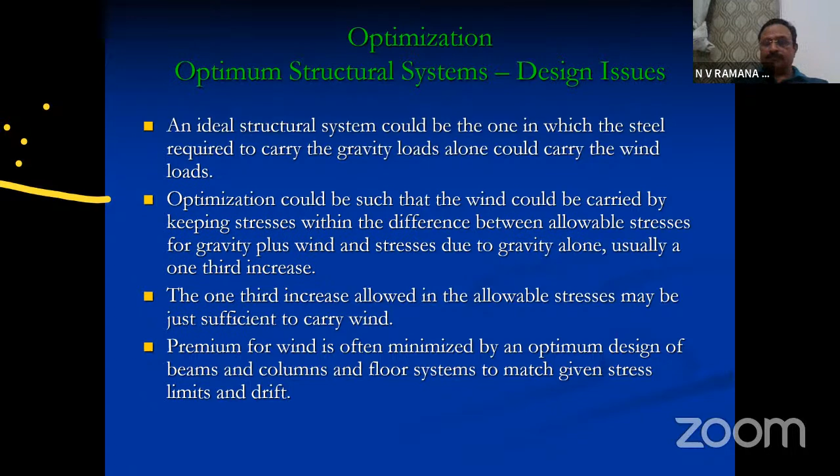In fact, the height to width ratios of buildings are very, very important. So the efficiency of the structural system is often determined by its height to width ratio. A large width for any height usually means larger stiffness. So this implies larger bay widths and larger lever arms for flange frames in framed tubes. So the optimum height to width ratio should be between 5 and 7. So this is how the different things are there.

The span dimensions for girders are there. For the beams and other things, the dimensions are very important. You cannot have a 2-meter depth beam. Span length often determines the steel quantity of the flooring. Small spans and small heights will really give efficiency. So smaller spans for exterior frames will lead to a more efficient frame. So what they do is in the outer frame, they place the columns very close, but inside they space them out. In the World Trade Center, the span was up to 1 meter between the columns. But inside you can have 4 meters, 5 meters. This is a very good idea that you can do.

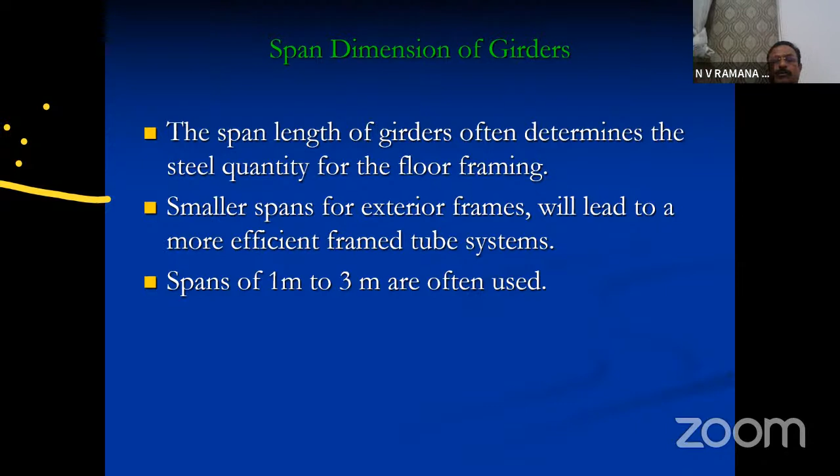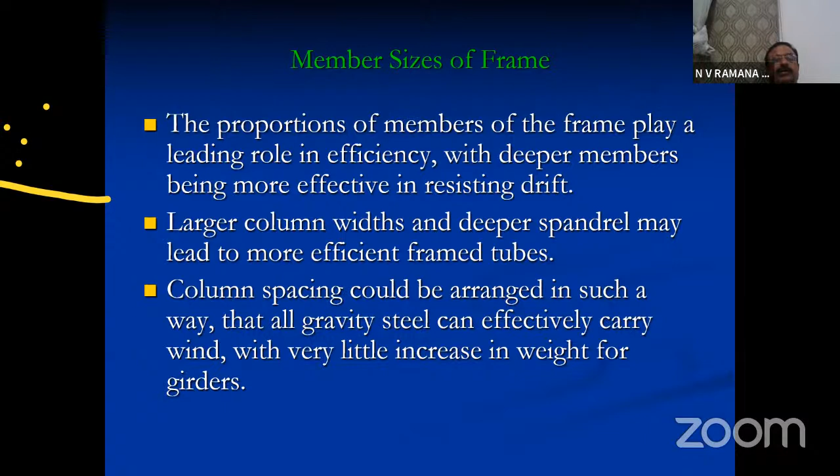So member sizes also are very important to decide, since the proportion of members of the frame plays a leading role in efficiency, with deeper members being more effective in reducing drift. Larger column widths and deeper spandrels may lead to more efficient framed tubes. The column spacing could be arranged in such a way that all gravity steel can effectively carry wind with very little increase in weight for the girders.

So the floor also is very important. The floor framing is about 20% of structural weight. It takes almost 20%, very important. So the span to depth ratios, the spacing of the beams, the slab thickness and composite design should be carefully considered in the floor system design. The span to depth ratio is normally in the range of 20 to 24, which is what we actually do.

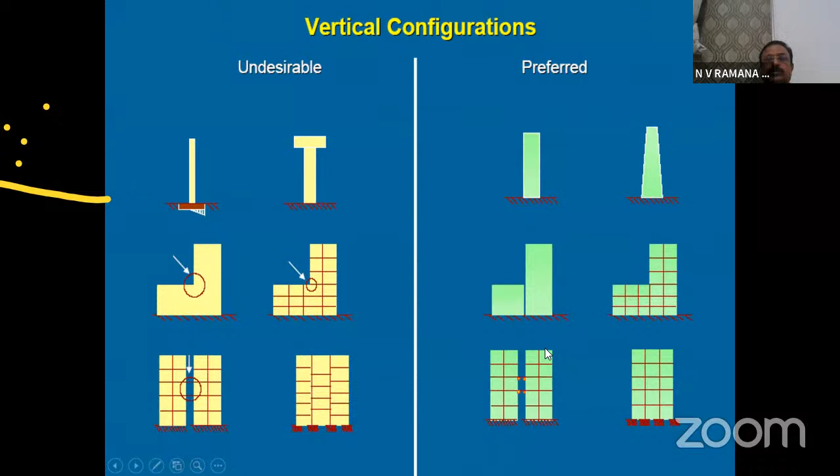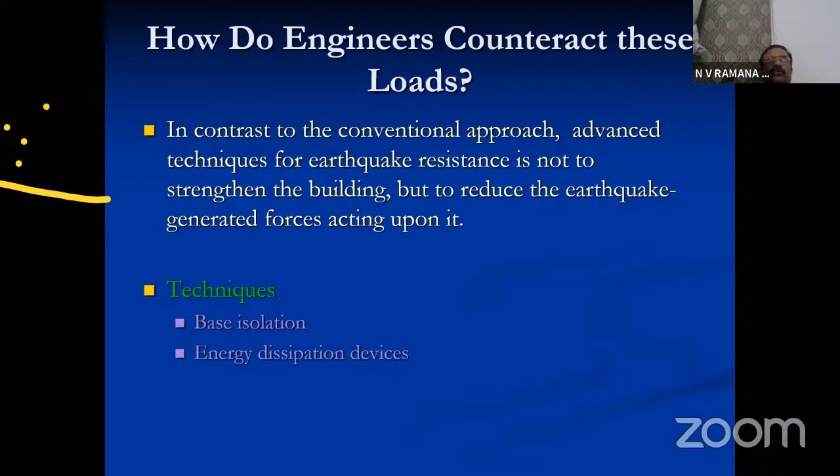So how do engineers counteract these loads? There are different ways of actually reducing the loads on tall buildings. In contrast to the conventional approach, advanced techniques for earthquake resistance are not to strengthen the building, but to reduce the earthquake-generated force upon it. If you go on strengthening it, you arrive at a building which is too costly, too expensive, so you have to find ways to reduce the force in it. So the techniques are like base isolation and energy dissipation devices. With base isolation, the word itself says the base has to be isolated. So only the base will vibrate, but the top will remain stable.

So the isolated base of a structure is supported by a series of bearing pads which are placed between the building and the building's foundation. So you have lead rubber bearings and other things like what we have in motorcycles and cars. So ideas from automobiles are transferred here. A lead rubber bearing is made up of layers of rubber, like a neoprene bearing on a bridge. All these ideas are taken and put in the building. So the bearing is very stiff and strong in the vertical direction.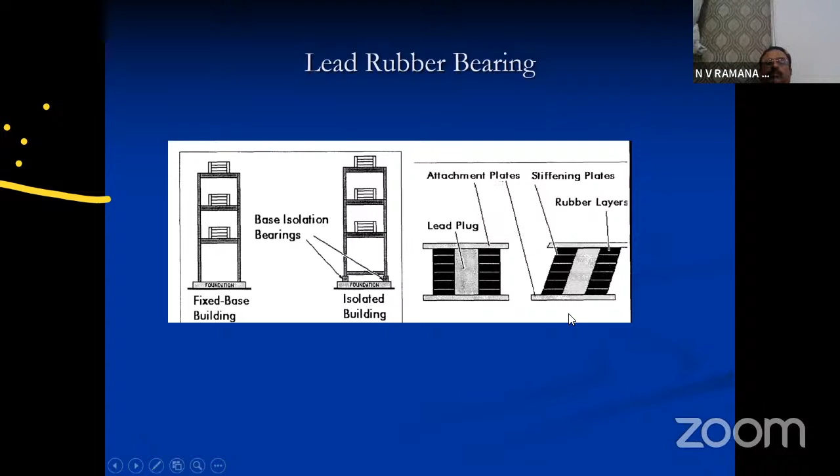Just see what happens now. So this is how a building is done. This is a bearing, and you rest the building on this bearing so that when there's an earthquake, the movement is like this in the rubber layer, so that the force is not transmitted to the building on top, and this will reduce the load. So you have different types of dampers like friction dampers, and a lot of research in dampers itself is going on.

So by equipping a building with these additional devices, which have high damping capacity, we can greatly decrease the seismic energy entering the building and thus decrease the building damage. In fact, dampers, I will show you an example, are very similar to a vehicle. So this is the system involved, and it is very easy to construct.

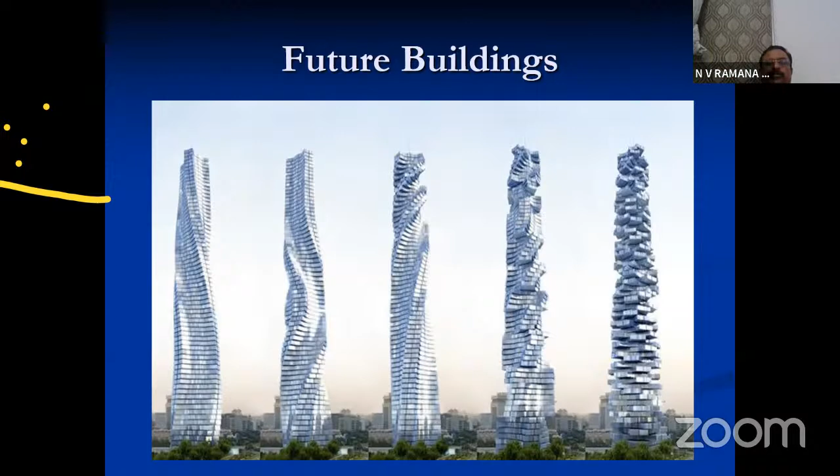And in the future, you will have buildings which are like this, and it may not seem possible, but you can still design it and see that it satisfies the needs. So this is the imagination. Sky is the limit, and for engineers, with the technology, with the software available, you can do wonderful buildings.

So another area which actually in high rise is a lot of concern is what we call green high rise. So somebody asked me, what is green high rise? Just painting the building green? No. Just by painting the building, you don't get a green building. You need to think of other things, how ecology and other things are there.

So for example, why green? Because Prabhakar was also working on a lot of sustainability issues. So I thought I should also include this in high rise buildings. How do you satisfy the sustainability issues? So this is a green building.

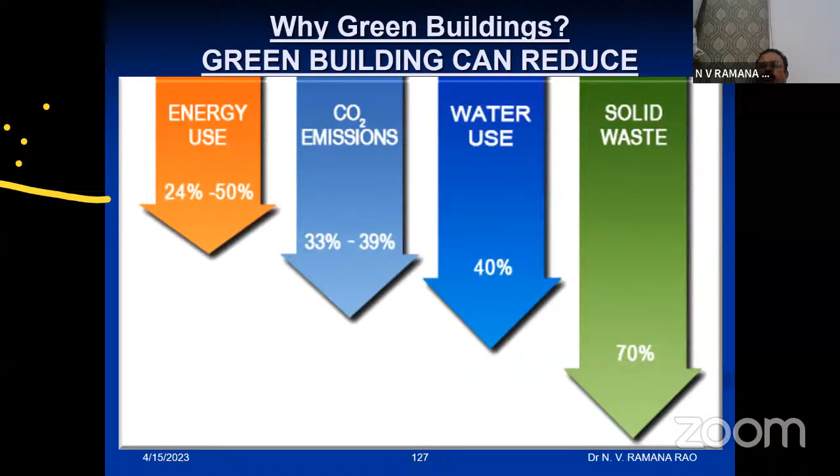You have very little energy use, carbon dioxide emissions, and water usage can reduce up to 40%, and the wastage as well. So if you do that, a lot of projects are coming in the city of Hyderabad, and if any of these concepts apply, I think it will make a lot of difference. So these are sustainability issues. A lot of steps are there. Let us come to building.

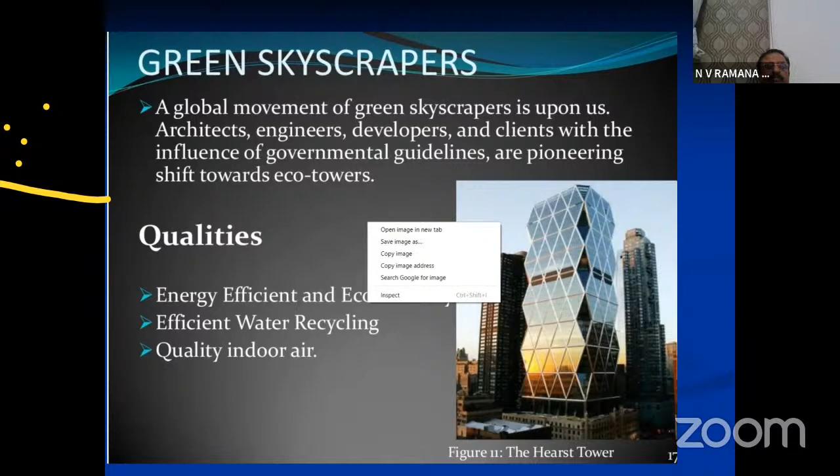So first, orientation is very important to make a skyscraper energy efficient, to enjoy the gifts of nature. So green skyscrapers, a global movement of green skyscrapers is upon us, with architects, engineers, developers, and clients, under the influence of governmental guidelines, pioneering a shift. So energy efficiency, ecology, efficient water recycling, quality indoor air. So these are things which we need to take on.

So globally, drastic change is coming in city infrastructure. So India, today, we are leading the G20, and a lot of things are there. So 75% of India's 2050 infrastructure is yet to be built. So a lot of construction activities are going to happen. A lot of cities are building now. So energy becomes a very critical thing.

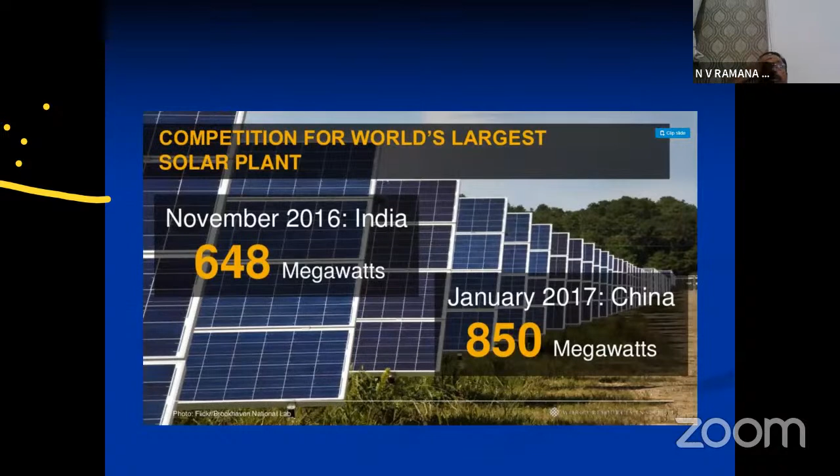In fact, our Honorable Prime Minister set targets for 2022. Already we have done it. So these are clean energy things that are going to happen. In fact, in the COP meeting, he said by 2070 we should have zero carbon dioxide emission. So all these promises are leading us to think of green building, and a lot of competitions are now available. At the top of the building, you're actually putting a lot of these things. And then green building materials are there.

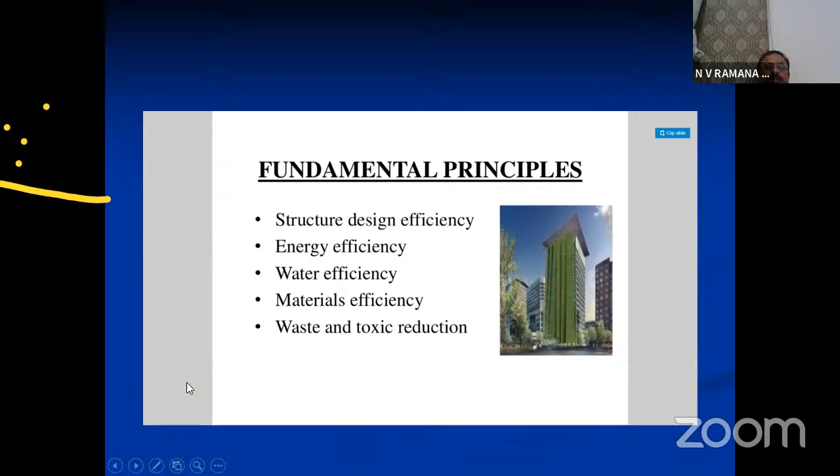But we need to see the structural efficiency, the energy efficiency, water; all these things are very, very important. So material efficiency, waste reduction, all these issues need to be considered if we really want to make India a green country.

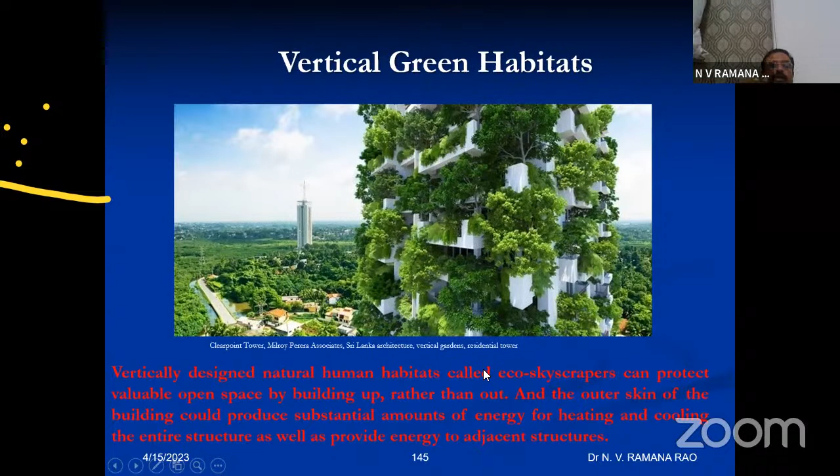You have now, in Italy, vertical green habitats. So on the buildings, they are building forests actually. So vertically designed natural human habitats called eco skyscrapers. They can protect valuable open space. So there was some issue concerning the birds. Birds cannot fly beyond certain heights. So bird strikes were there, killing them. So these have been resolved now.

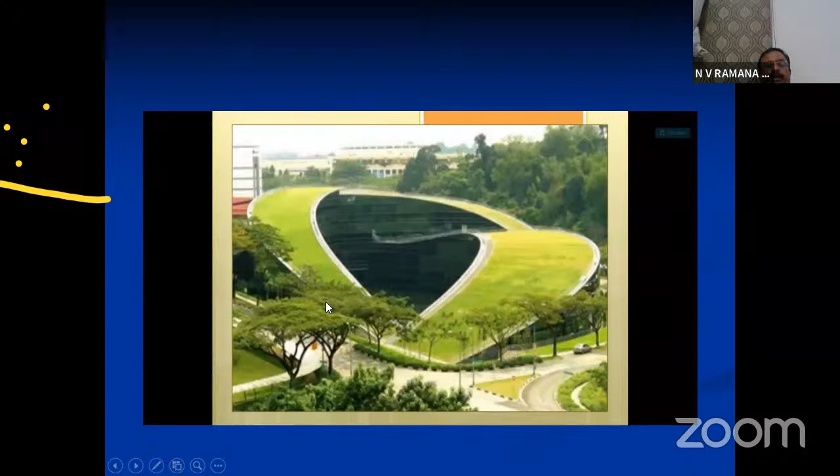So you have to start thinking green, especially the rooftops can all be green, the gardens, because now there's no space at the bottom. So have the greenery on the top of buildings, on the steps of the building, and you can start seeing green things happen. So this is an auditorium in Singapore. The roof they have made green. People actually sit on it and talk. And below there is an amphitheater and other things.

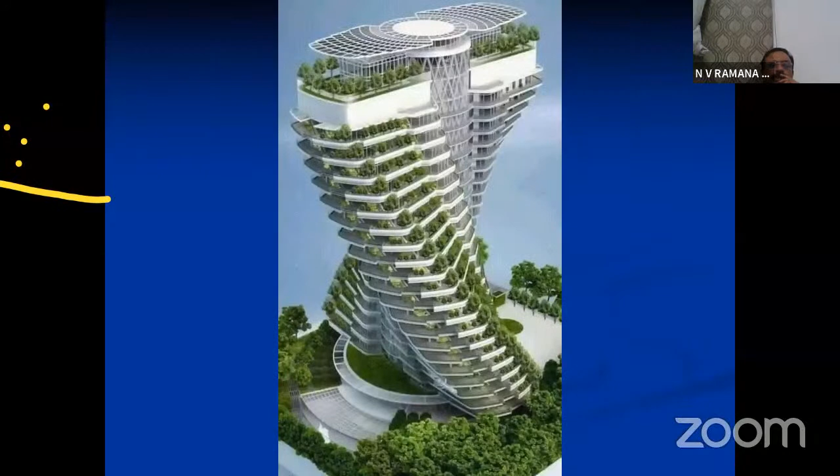So green tall buildings. These are again green buildings. These are all green. This is in Taipei, Taiwan. Taiwan is a small country, but you see the type of innovations that they are doing is really amazing, and I think it's very inspiring for all of us.

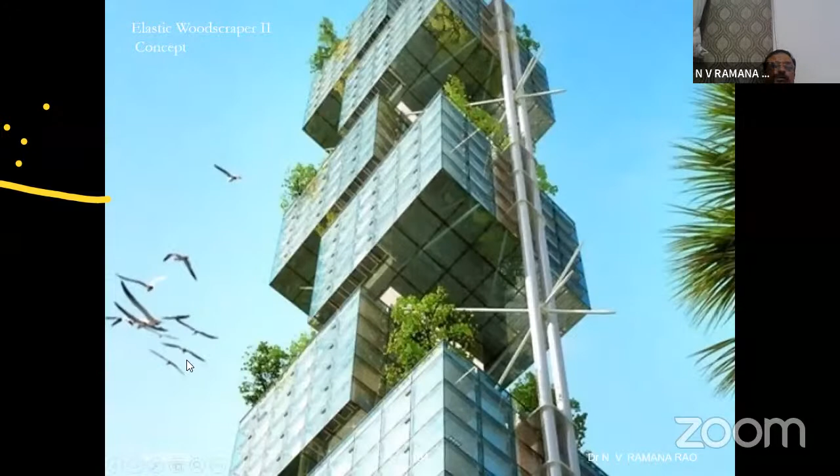So, now the concern is regarding the birds. So there is a restriction now coming. The birds can't fly, so they're hitting these buildings. Where there's greenery, they come and sit and they can't move forward afterwards. There is a problem and a lot of things. So there's a limit that has been put by the governments. So you see here, this building height is restricted, so the birds can fly over it.

And again, most of the buildings are going to be looking like this in the future, because we need greenery, we need green buildings, we need safety. And please note that these are not animated, these are all real pictures, and this is how it's going to look, top of building. And it's not on the ground, it is in the sky.

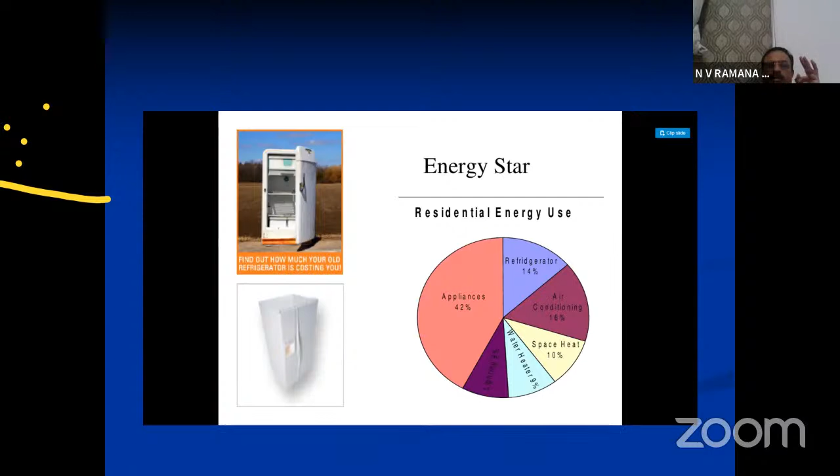Energy efficiency is very, very important. So renewables, reduction of the use of fossil fuels can also be added, like solar on the rooftops, and wind turbines in the gap between buildings, and improve their economy. So this is the future, and now I think we need to think of things which will actually make a difference to the students. So thank you very much.

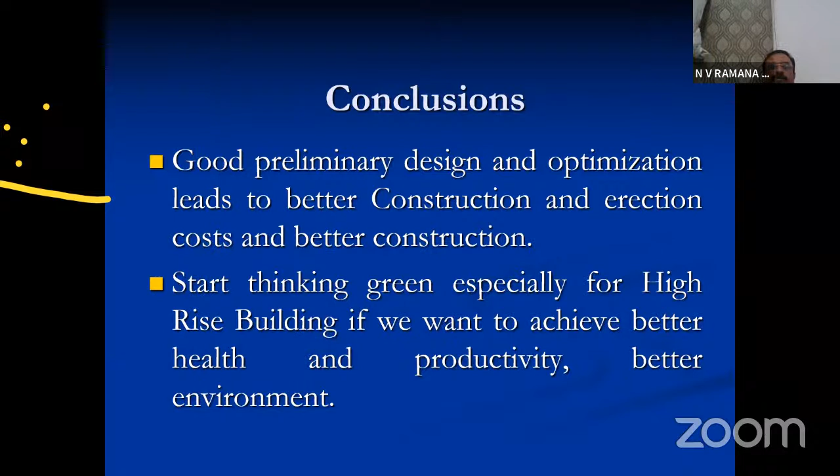I just wanted to raise these issues, and I don't know whether I've taken more time. So I would like to conclude by saying that good preliminary design and optimization leads to better construction and erection costs, and better construction. So start thinking green, especially for high-rise buildings. We want to achieve better health and better environment. So namaste, thank you very much.

Thank you, organizers. I'll just stop sharing, and if someone wants to ask questions, we can take them. Thank you, sir. Hello, am I audible? Yes, sir. Good evening, sir. Wonderful lecture. Congratulations, Dr. Ramana Rao Garu. No, I just made it for a general audience. Very interesting lecture. You have kept up the status of engineers; we all feel proud of engineers. Though we are not able to do those things, we are a part of that. Very encouraging lecture for engineers. Thank you very much. Any questions I'll take, sir?

Namaste, Ramana. I'm Venkatesham, your junior. Namaste, sir. Sir, hats off, sir.